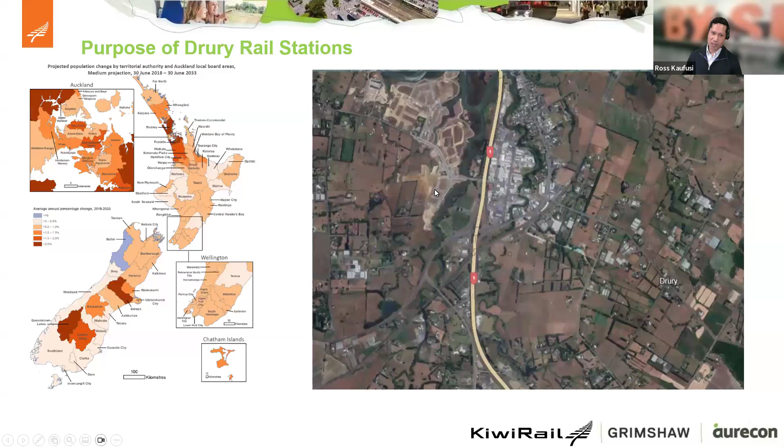Especially in the northern side and south of Karaka, you can start to see all the property boundaries being excavated, and the roads are going to be installed, and then it gets even more developed now. So this is from 2025, and this is just emphasizing the rate that South Auckland is growing. So you saw before, where they were just getting all the roads ready for the new housing, now it's housing being installed. You've got stuff down here being developed as well. Got more stuff over here, and then I believe this is our station over here.

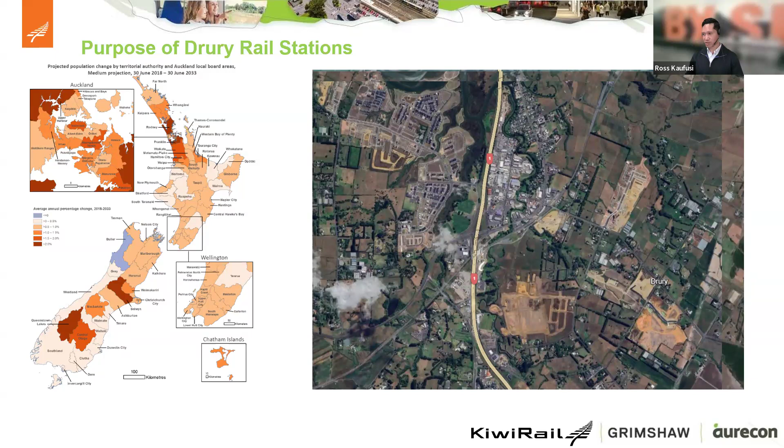So these are not small incremental developments. They're entirely new communities being built, and so with growth at this scale, it's vital to get new transport infrastructure ready from day one. Oh, yep. So with the expected growth rate, that's pretty much where Drury Stations come into play. This project is part of a 1.5 billion New Zealand government funded initiative to expand Auckland's Southern Rail Corridor. The primary purpose of the stations is to support population growth, but it also serves as a catalyst for sustainable transport.

For those living in Auckland, this should be quite a common image of today's traffic. It's not that great. It's a photo of State Highway 1 as you're heading north. To be honest, I'm not too sure what day this was taken, but I've been caught out on Saturdays driving around midday, sitting in traffic thinking, hey, wait a minute, this feels like the morning rush hour during the weekdays. So I've got a few friends that live out in Takanini, and I asked them how long it takes them to get into work. They said it's about 2 hours.

So being a good engineer, I figured I'd fact check them because 2 hours sounded ridiculous. And trusty old Google Maps was agreeing with them, so I was a bit surprised. And Takanini is further north from Drury. So you can imagine once Drury's developed, and then even further south around Paerātā, the traffic's just going to be crazy.

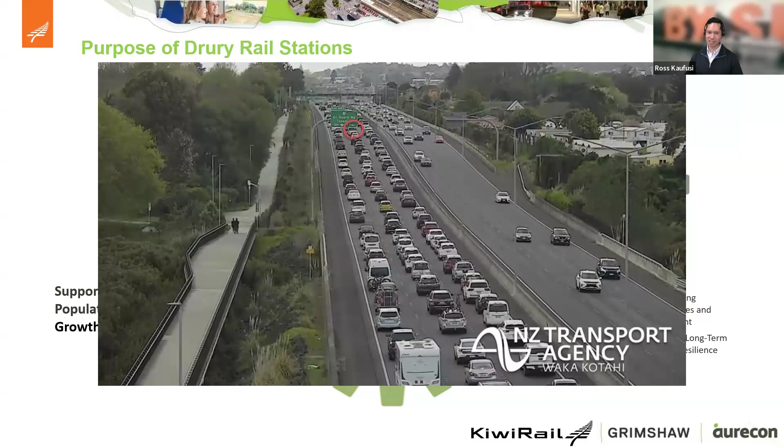So the stations are designed to reduce car dependency, and they're aimed to enable a real shift towards public transport. The idea is to help ease the congestion and lower emissions as well from a sustainable point of view. They're also designed to anchor transit-oriented communities, integrating housing, jobs, and services around public transport, which is a key focus for us here at KiwiRail.

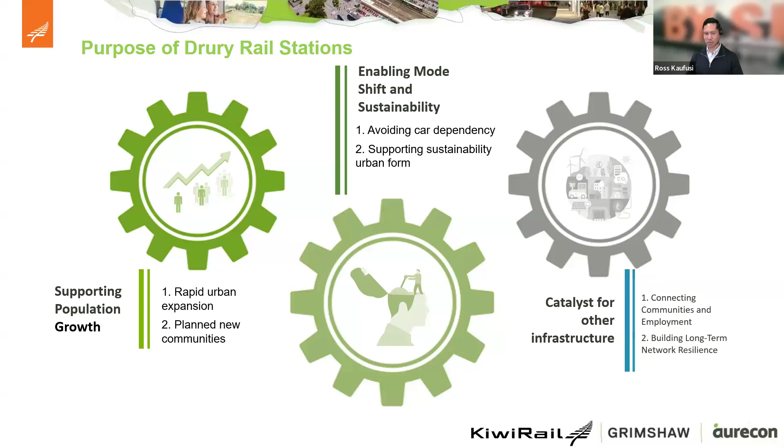Alrighty. So what now? As part of our preparation, we were trying to figure out how we're going to package this up and hand it over to someone who will take this through design and then eventually through construction. What we needed to do was to start defining our project requirements. This is not a full list of our requirements, just a few snippets I took for this call.

One of our main drivers was to adopt a no-frills modular design approach. This is something that should be pretty common across the industry now. The idea is to use common materials, common details, and common components across all three stations. Liam will cover this in more detail, but the intent of the modular design was not only to save on both design and construction, but also to provide a safer design. If you're building the same design over and over again, people become more familiar with it, and it helps with the ease of construction.

Also, with the South Auckland area set for decades of growth, we needed to consider future flexibility and look at how rail and roading networks might expand in the next 10, 20, even 30 years. So we made it one of the requirements to not preclude any future upgrades or extensions. Each design decision was made with a long-term purpose.

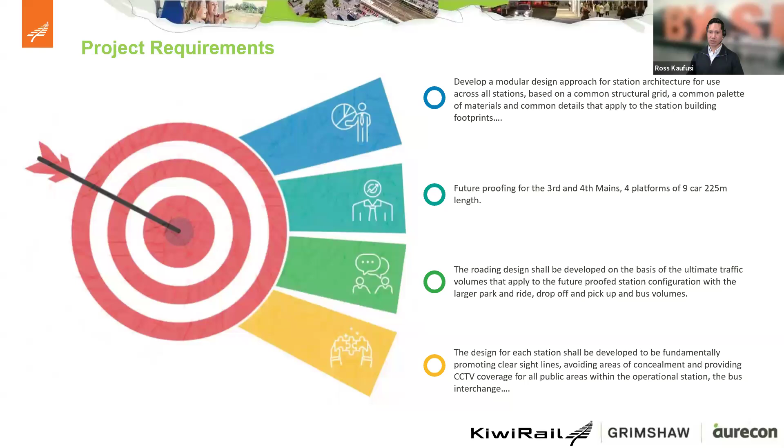All right, so location, location, location. With that all said, cool, we need some stations. Where are we going to put them? Since we're talking about South Auckland, there's only one line that gets down through South Auckland. That's the NIMT line, the North Island Main Trunk line. So the idea was, okay, we've got this line. We'll put some stations between Papakura and Pukekohe because there are no existing train stations there at the moment.

So what you see now on the left, this is an image with all the proposed projects that we had at the time when we were putting all the scoping and all the requirements together. This image is to show all the proposed projects, or current projects that are happening and future projects that will be happening. And so we were looking at this and said, okay, we've got all these projects. Where's the best place to actually integrate these stations into this project?

Hopefully you can kind of see those three arrows of Drury, Ngākōroa and Paerātā. It's a little bit faint, but hopefully you guys can see it. So those are the locations, and what you can see is how it's actually integrated. So you've got the red line. The red line shows the Papakura to Pukekohe electrification line. So that was undertaken by KiwiRail, which was completed earlier on this year.

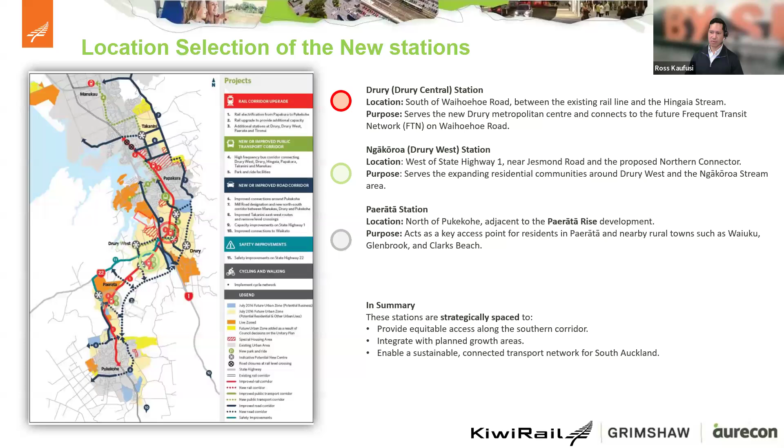All right, cool. So now that we've covered that, we know that we need some stations, we kind of know where they're going to be positioned. Now we're getting into a position where we can say, hey, we need to put together a scope that we can hand over to some designers to carry on. And so what do we want to do? We want some stations. How do we want to connect to these stations? Do we want an access road? Do you want people to walk up into it? Do we want buses to just stop right outside? How are we going to treat the water? So all of this was going through our minds as we were putting together the scope for this.

We're going to have some new platforms. How big do we want the platforms? Well, we want them to be 6-car, but we know that in the future AT want to introduce 9-car trains. So let's design for 6-car now, but future-proof for 9-car, so we don't have to do too much.

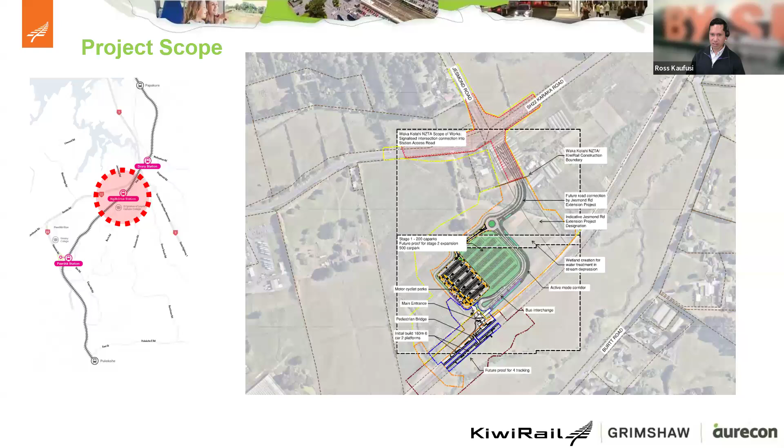Cool. And lastly, we've got Paerātā. So again, the scope is very similar to the other 2 stations. At a high level, we've got parking facilities, the same platform requirements, same treatment of runoff requirements. We've got bus interchange, and we also need an access off State Highway 22. So this is what we've done over here. But what's a little bit different is that we weren't too sure what was happening with the State Highway 22 upgrade works further down towards this side. So we've actually designed this package of work and then handed it over to Waka Kotahi NZTA to implement.

What we've also done is, if you can recall, on the other slide we had the Pukekohe Expressway over here somewhere. So there's a link that joins us up to the station. It comes in and links up to this roundabout. Once that links in, there's potential for that link to be 4 lanes. At the moment, we've only got 2 lanes over there. So as part of our scoping, they said, can you make sure this is future-proofed so that it can be expanded from 2 lanes into 4 lanes?

And while you're doing that, can we ensure that the other project, the Papakura to Pukekohe electrification project, which is running along the rail line, can space out their design so that nothing changes for them? So that was part of the project scope. Just make sure that everything is done with all those future things in mind. All right. And so that's just a quick snippet of what our baseline scope was for these stations.

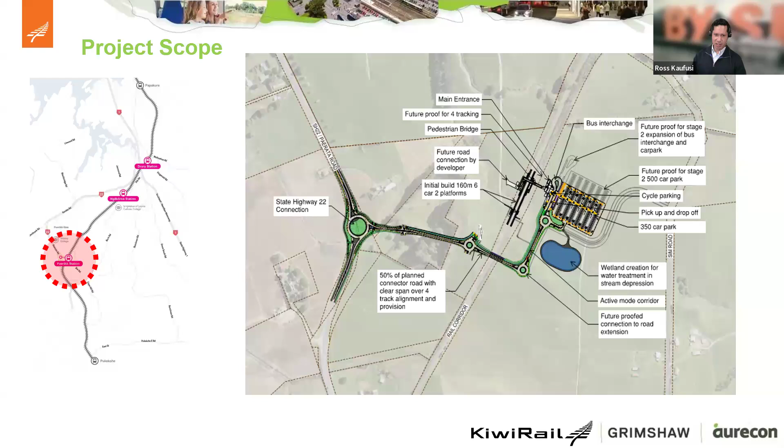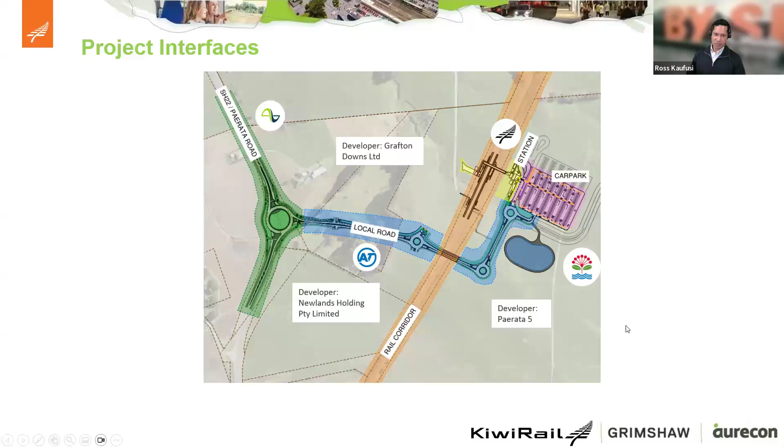So, right. From what we've seen so far, the project is much more than just building inside the rail corridor. It's about delivering integrated infrastructure that connects with multiple stakeholders. The image on screen right now shows you how many parties are involved. And remember that we are not just building KiwiRail assets, but we're building assets that would eventually be handed over to other owners. So these are just some of our key interfacing partners at the moment.

We've got Waka Kotahi NZTA, which is the green bit over here. You've got third parties in the area, so some developers: Grafton Downs, Paerātā 5, Newlands, they're all within the area, and they all have an interest. You've got Auckland Transport, who are responsible for the local roads, bus connections, active modes. You've got Auckland Council, ensuring our investment aligns with their growth plans and zoning. You've got Ministry of Transport, Supporting Growth Alliance. So that's just a short list; we've got many more interfacing partners. This is just to highlight the highly collaborative environment we've got here, and managing these interfaces has been crucial to this project.

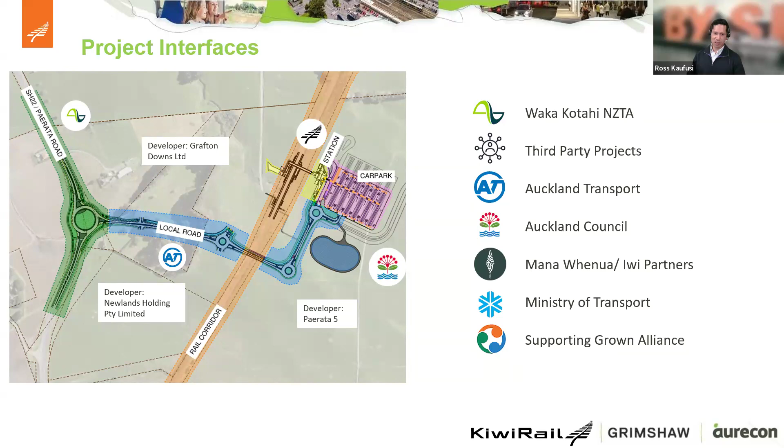All right, so just going on that kind of thought. Having an understanding of what assets we're building and who will ultimately own and operate them has helped us structure design into packages that could be delivered independently. So we've divvied up our packages into 3 key packages: the state highway package, a station package, and a civil package.

As I mentioned earlier, this has enabled us to engage Waka Kotahi NZTA's delivery team to deliver the state highway package, which is the one that we've done for Paerātā. The reason why we've done this is to ensure a smoother handover process to them, because they will become the eventual asset owner.

Going on these 2 packages, the reason behind separating the civil package from the station package was essentially driven by limited numbers of contractors with experience working in the rail corridor. So we didn't want to put that restriction on the market. There's quite a large portion of the civil package that doesn't really need to interface with the rail. Let's separate that out and open it up to a broader market.

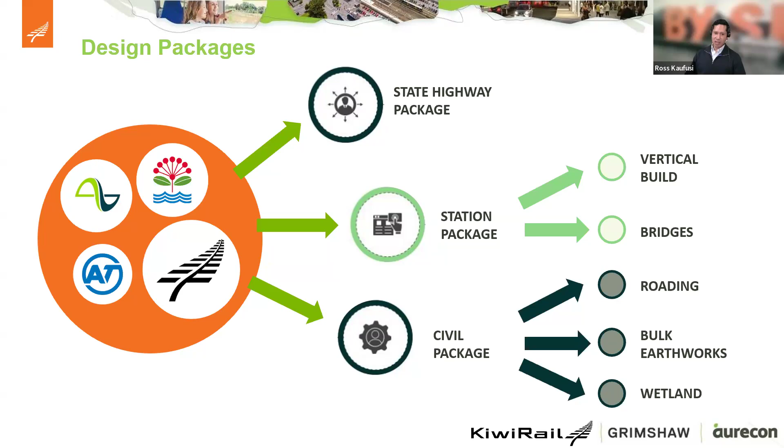And then conversely, for the station package, that's allowed more specialist structural contractors to do what they do best, and that's delivering complex station structures within a live rail environment.

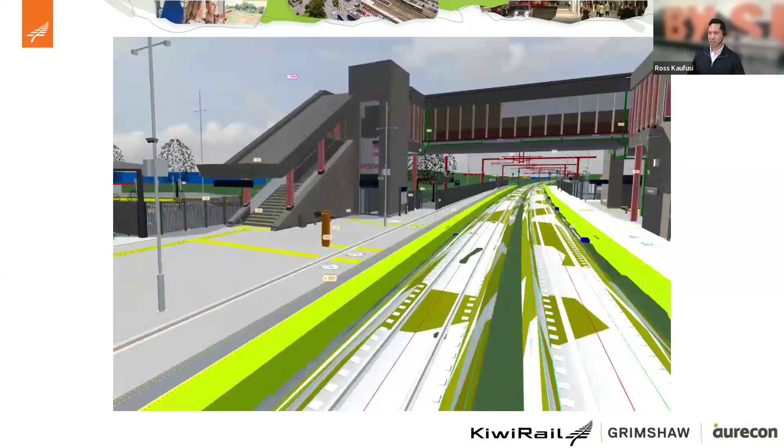All right. So that brings me to the end of my section. As I transition to design, I thought a good way of transitioning to Liam's bit was to show a very quick snippet of our federated Drury station Revit model that we designed during the design phase. It's quickly flying through the models at the moment, so apologies about that. I just didn't want to take too much of Liam's time because I know he's got a lot to talk about.

But to sum it all up, the Drury Rail Stations project is more than just building new stations. It's about planning and designing transport infrastructure that supports how Auckland will grow over the next 30 years. So I will now hand it over to Liam, who will take you through the design in more detail.

Cool, thanks, Ross. Hey everyone, my name's Liam McIntyre. I'm part of the rail design team on Drury Rail Stations from Aurecon. I thought I'd start off with some renders to show you the context around what we're building here. This is showing stage 1 for Drury Station. You can see the main station building there in the centre. I'm not sure if you can see my mouse, but in the centre there, below the Great South Road marker.

Great South Road running up the side there, which is an existing road, the main road through Drury Centre. Along the top you can see Waihoehoe Road, which is an existing road and road over rail bridge, main access for vehicles into the station. The station access road, which we're also building, will connect down to Flanagan Road at the bottom by the main roundabout by the station.

Along with that, we've got a car park with 350 parking bays, and a bus interchange with bus layover bays. On the Great South Road side, we've also got some bus stops that we're putting in there. So patrons will be able to enter the station from the entry on that side and also from the car park and main bus interchange side. We also have stormwater treatment at the bottom of the screen there. You can see the wetland in the visualization.

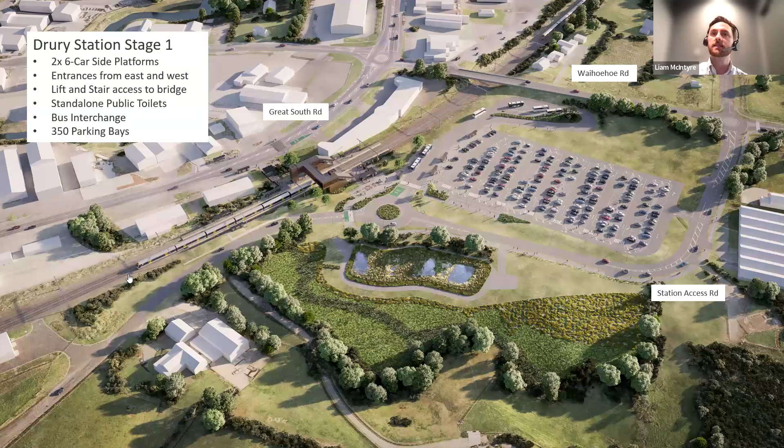And then for the station itself, we've got an entry canopy on both sides covering a gate line. We've got a public toilet by the bus interchange, and then a bridge to access between the two platforms with vertical transport, stairs, lifts, and entryways on both sides. And we've got the platforms there.

In addition, I'm also going to show you what our stage two looks like. Stage two is kind of what Ross spoke about before, a combination of what we're doing as a project in the future, but also seeing how that ties into future projects as well. If I start at the top of the screen there, we've got Waihoehoe Road, which is an upgrade widening project that Auckland Transport is undertaking in the future.

So a widened bridge there. This is an early concept of it, so it won't necessarily look like this, but it's showing how our design can tie into that. Also showing how we could have an additional roundabout in the bottom right corner there, underneath the station access road marker.

So that would be for accessing one of those developments that Ross was speaking of before. Car park increases from 350 to 500 parking bays. And then for the station itself, we're showing additional platforms to allow for the third and fourth main.

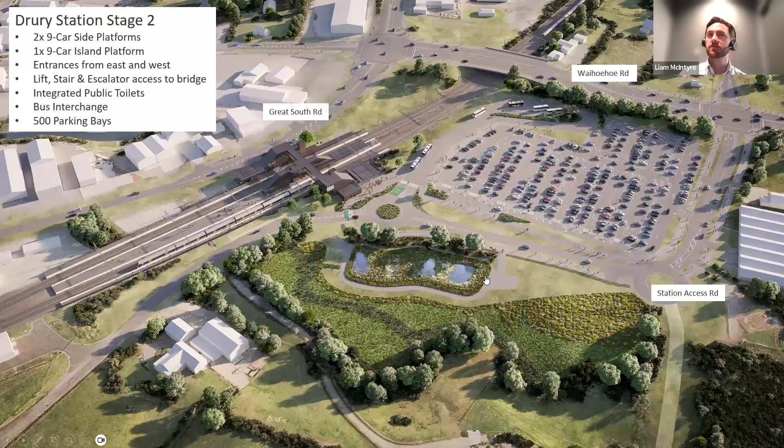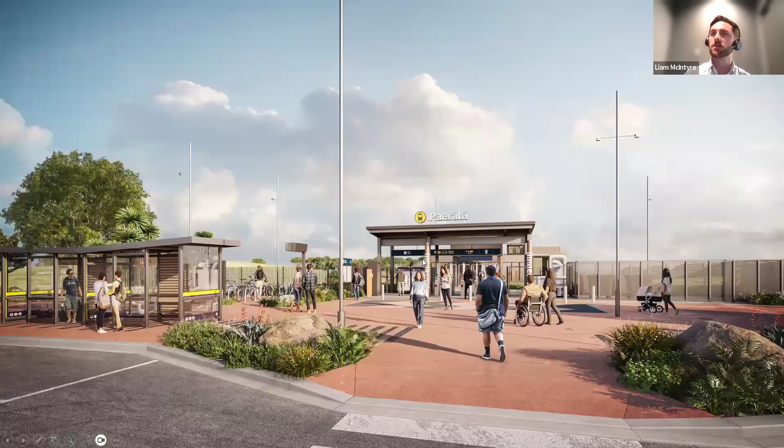And you can also see a visualization of what we're going to see for the Grafton Downs development. You can see some conceptual sort of buildings there. So trying to indicate what we're going to see when we have that development and how that's going to tie into our stations. I also wanted to show you what entries to these stations are going to look like. So this one here is the entryway to Paerātā Station. Both stations are very similar at stage one.

So you can see an entry canopy there, similar entry canopy to what we're using across the network. You will have seen some of these go in at stations like Middlemore, using a similar sort of element there. Also at Parnell, got similar ones there too. Then along with that, we have a security kiosk on the side for the gate line, ticket machines, and a bus shelter for the bus passengers. So as I say, very similar design at Drury Central.

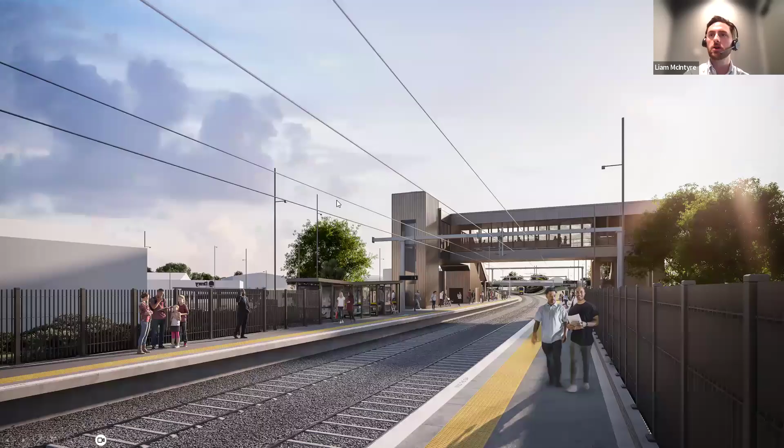And then I wanted to show you what we're going to see on the platform level. So this is back at Drury Station. This is on the car park side, so the car park is off to the right of this image. So this is what we're building now at stage 1. You can see we've got platform shelters there, which are similar to the major shelters that you see across the Auckland Transport network for buses. You can see our bridge and everything in there. And then moving forward to stage 2, looking at widening out the platforms for the increased patronage.

So you can see 1 in red is the entry canopy. So this is the stage 1 version of it. So it's a reasonably small footprint, but it serves the purpose for what we need with the demand on these stations at this stage. 2 in yellow is the staff facilities. So that is things like a bus layover for the bus drivers to rest. We've got one of those at Drury Central, given the bus timetables through there. And it also houses the security for the station.

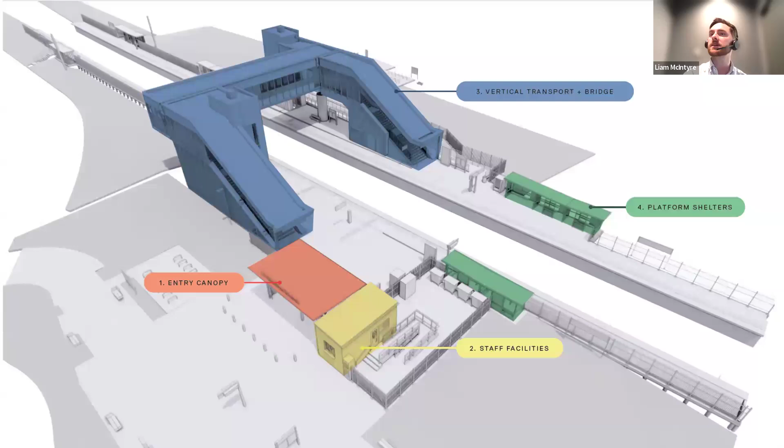We've also got our vertical transport and bridge. So that is the stairs and overbridge that I was speaking of before with lifts, and you can see the 2 lift towers. And then our platform shelters, the 2 in green, you can also see some further down the platform as well. So they are the major elements that you see across the network.

So along with the overall design, I thought I'd take you through some key design considerations and challenges we've had on the project. So the first one there is the modular design process, which Ross was speaking of before. Optimization of our concept design, how we've taken from the Supporting Growth Alliance concept design we received at the start of the project, and also a little bit on the ground improvements we had to undertake at Drury Station, given the ground conditions out there.

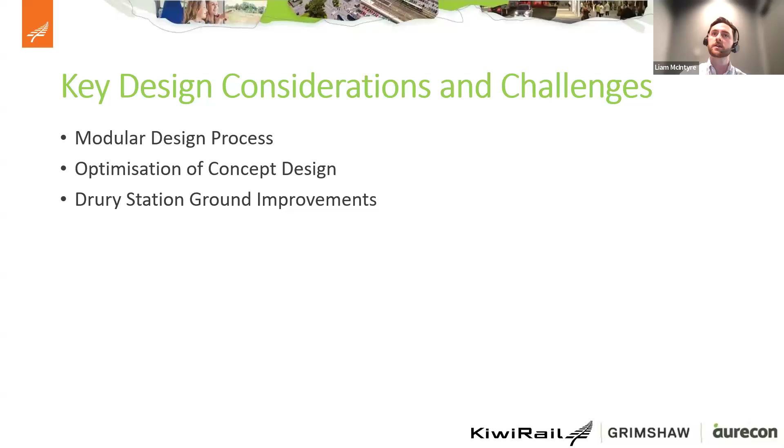So first going through the modular design, a very important aspect of how we went about these designs was making sure that everything was modular across the 3 stations. These figures are provided by Grimshaw. So what we did was we separated each element of the station out into a discrete module that we could take forward from concept right through to construction. And then this allowed us to simplify our design by having one single set of drawings for each module that could be used across each station.

So the vast majority of our drawings for disciplines like architecture, structures, bridges, most of those drawings are actually project-wide drawings. So this carries a large range of benefits and simplifies our design process. We only have to do these things once with very few tie-in drawings to make them applicable to each site. It optimizes it through the construction phase as well. If there are learnings from one station, they can be used on the other stations because the designs are exactly the same. It also allows for plug and play future expansion.

Since we've already designed module 3, as an example, the side stairs, we can pull that across once we come to having the 3rd and 4th main coming in. And also it allows us to pull these modules across into future stations on the network. So if electrification was to go further south past Pukekohe, then we could do very similar things. The design's already sitting there. We just need very few design drawings to tie everything in. And it also allows for optimization of the procurement, makes it easier for KiwiRail to procure across all 3 stations in different methods, depending on how they want to do that, if all the designs are the same.

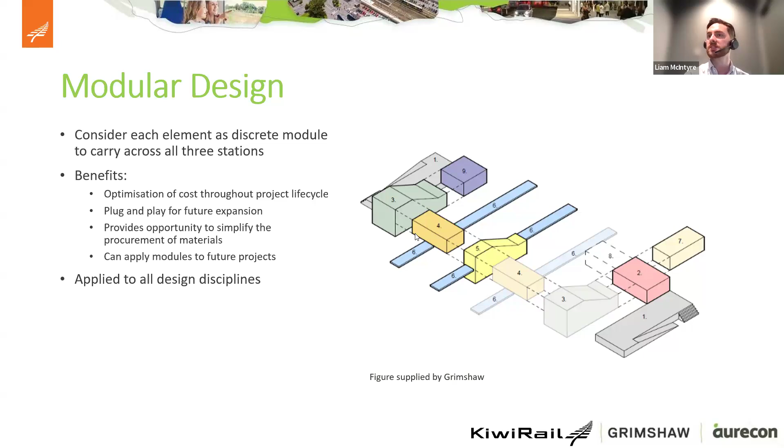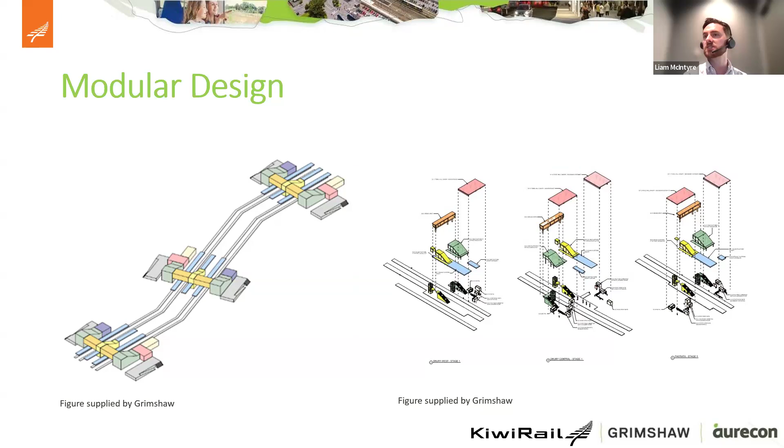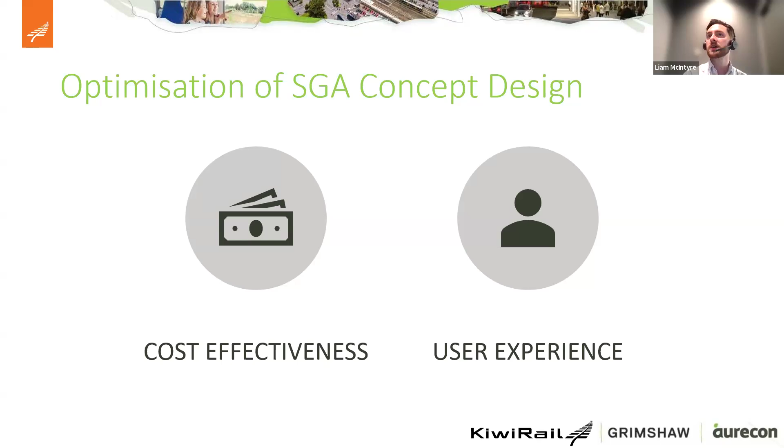So the next thing I want to talk a little bit about was optimization of the Supporting Growth Alliance concept design. So we took the concept design and looked at it for 2 main things, cost effectiveness and user experience, as the 2 main things that we wanted to optimize from the concept design to make sure it was all fit for purpose.

The main one I want to talk to you about is the optimization of the Paerātā pedestrian bridge. So the render in the background there is showing what stage 1 is, the render I showed you previously. You can see it's different with Drury Station, where passengers from the car park and the bus interchange are accessing it from the bridge level rather than from the ground level like Drury Station. And this is to do with the existing site. It's a much higher level on that side than the rail level, so it makes more sense to have people enter from that side.

Now, the initial SGA concept design didn't have passengers walking across the bridge. They had them going down, as you can see, my blue path with the white arrows in it. So the initial design had vertical transport in the form of stairs or lifts or ramps going down and then going across at platform level down to the platform. And then if someone wanted to access the other platform, they would have to walk back up the stairs and then come back down the stairs on the other side.

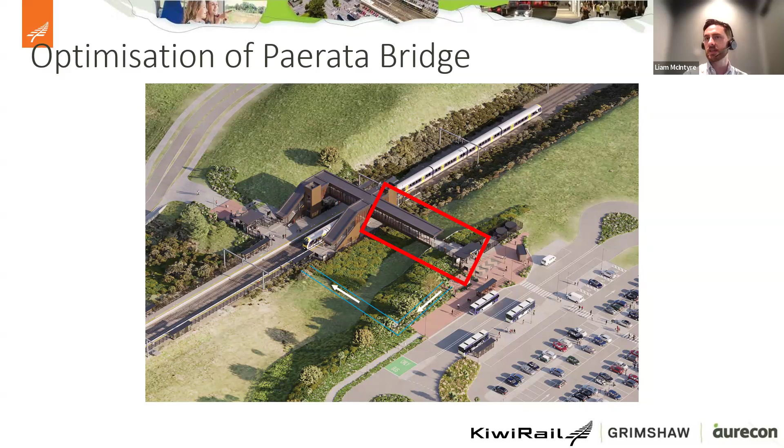So from a user experience perspective, this is not a very good outcome. And this situation would be present, at least in the initial concepts, throughout the stages. So even when the 3rd and 4th main came in, passengers would still have to walk down and then walk back up a set of stairs to access the other platforms. So we looked at some concepts about how we could fix this, and we found that there was a reasonably cost-effective way to do this.

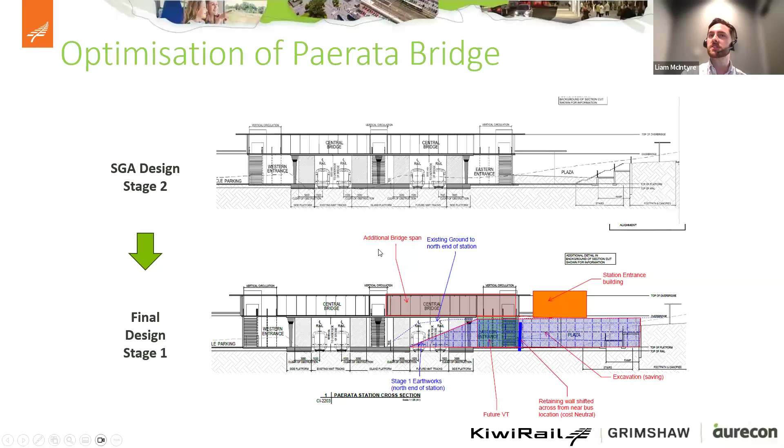So as I said before, enhanced customer experience at both stages. Similar overall cost when you take into account the construction of these additional stairs. Building the additional span of the bridge now was an additional cost, but not that significant at stage 1. And obviously, it optimizes the overall cost for stage 2 as well. We no longer have to come in and build an additional span when we put in the 3rd and 4th main. And this comes with a reduced overall footprint and a lower carbon footprint, less materials we need to use. We don't need to build these additional stairs for the project lifecycle, and just fewer elements to construct at stage 2.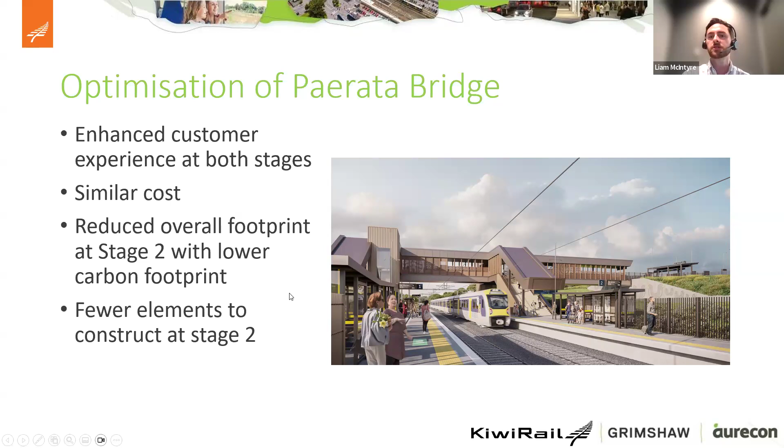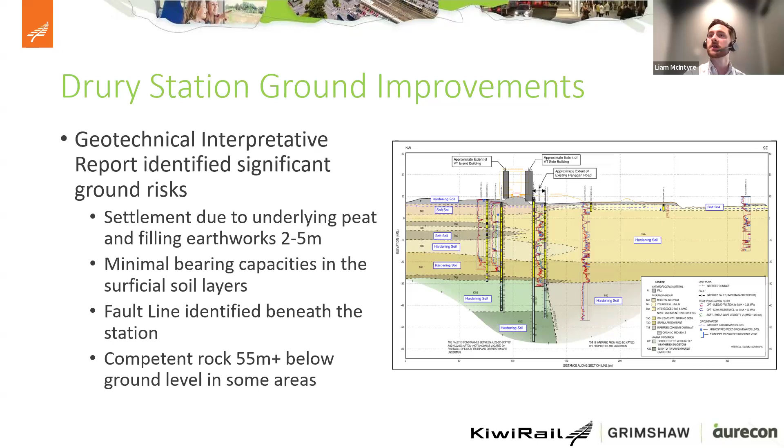And we also had underlying peat layers running all through this area. So there was a significant settlement risk in this area, and a traditional pile design was not going to work well. I was going to have settlement issues outside of our allowable bounds. And along with this, we also had minimal bearing capacities in the surficial soil layers, and competent rock was more than 55 meters below the ground level in some areas. So because of this, we decided we would need ground improvements in this area.

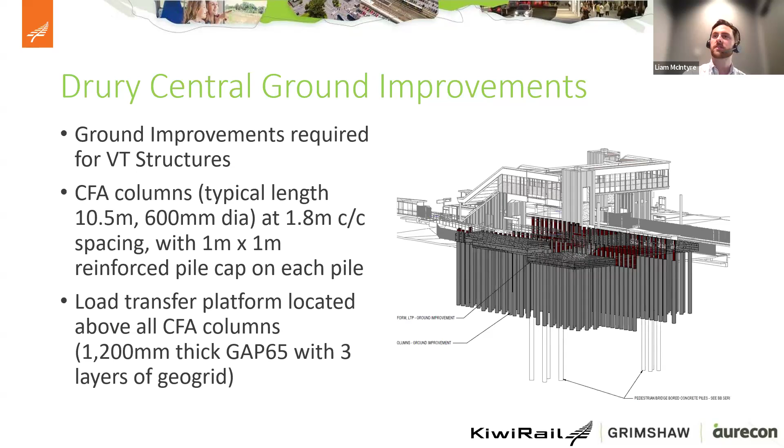And it also allowed us to actually design a module for ground improvements. So now when we do future stations, we already have a ground improvement module that we could use tied into the stations. And this is going to optimize the cost life cycle for all future stations across the network now that we've got this additional module as well. So that's me going over the design. I'll hand over to Alpesh now, who will take us through a little bit of the construction phase.

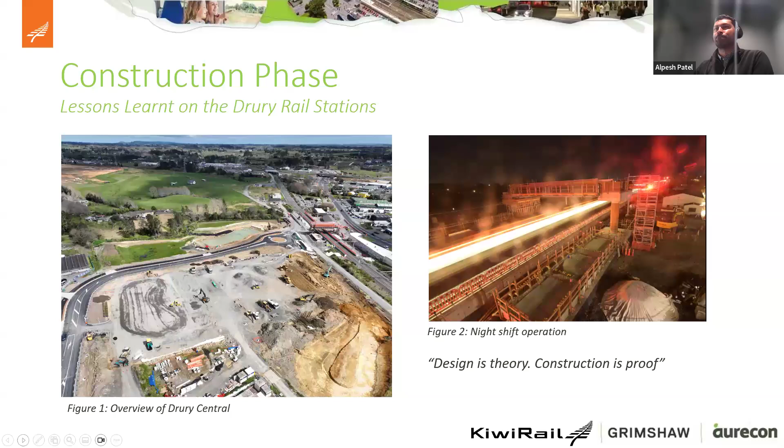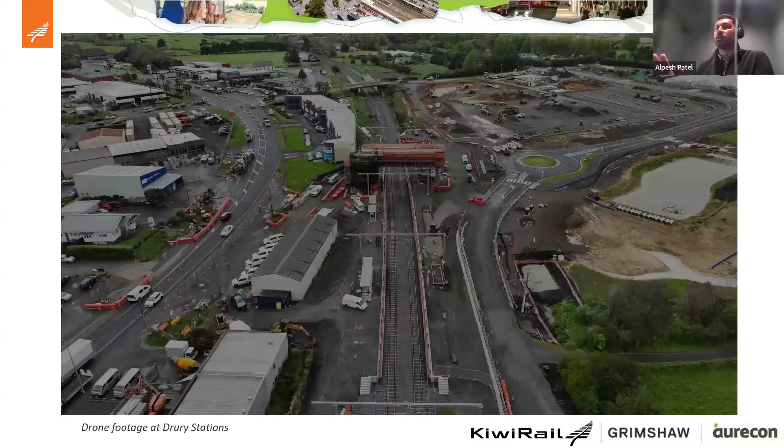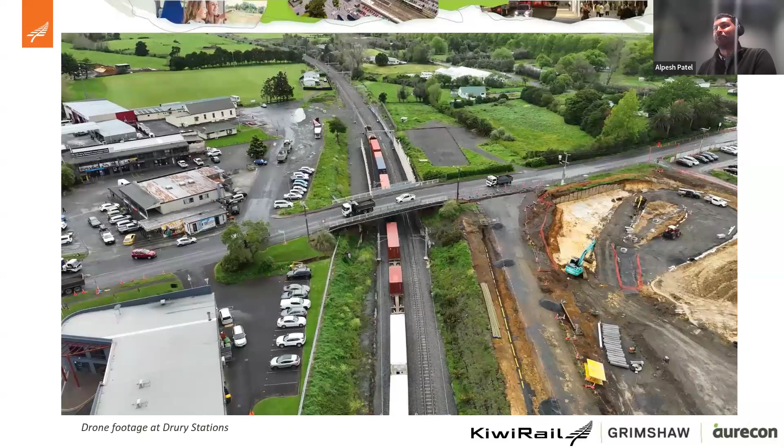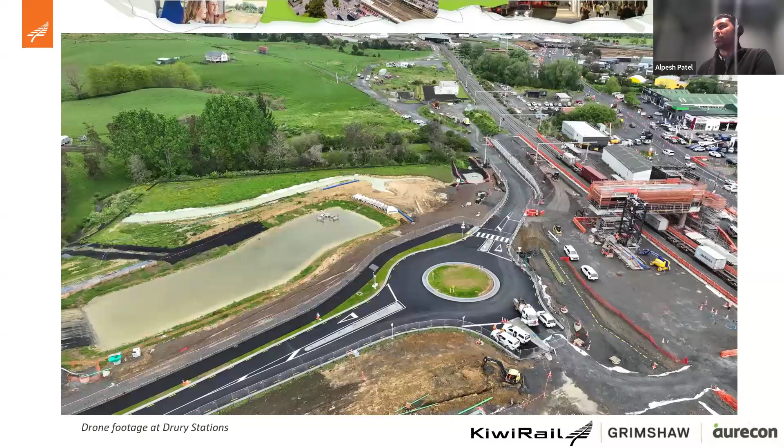But first, I'd like to just understand the current state of play. Here is drone footage of Drury Central, courtesy of Jason from KiwiRail Technology Lead. Here you can see the pedestrian bridge at Drury Central, and on the right-hand side, you can see the car park and the bus turnaround area just in front of Waihoehoe Road Bridge. And just turning around, you can see the wetland, which is the current retention pond, the station access road roundabout, and on the right-hand side, you can see the pedestrian bridge that crosses over to Great South Road.

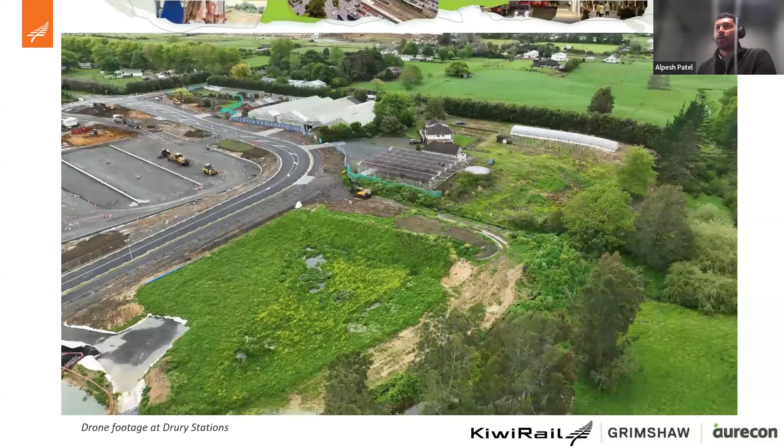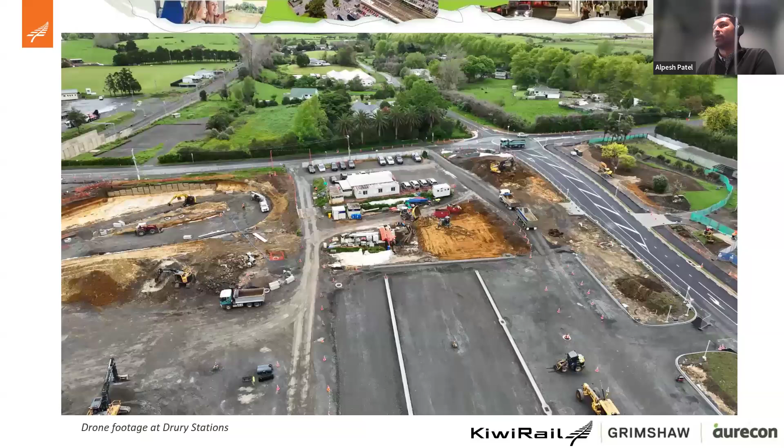And here is a final shot of the car park area, which is in build. On the left, you can see the bus turnaround area, which you can see the exposed clay at the moment, which we're currently constructing. Perfect. And the next one is the Paerātā site, which I'll quickly talk through as well.

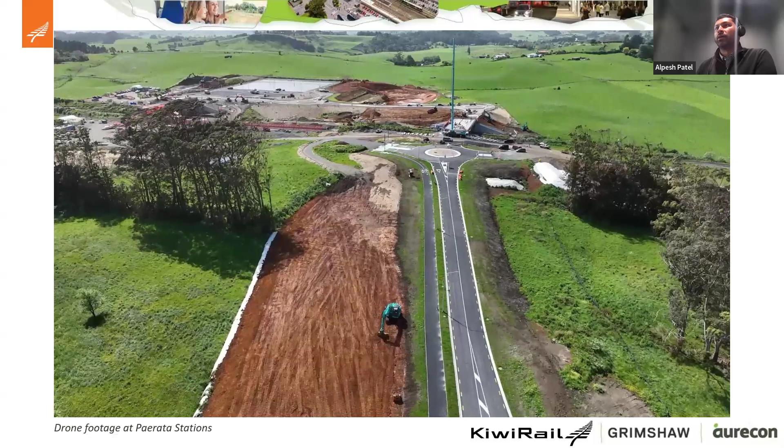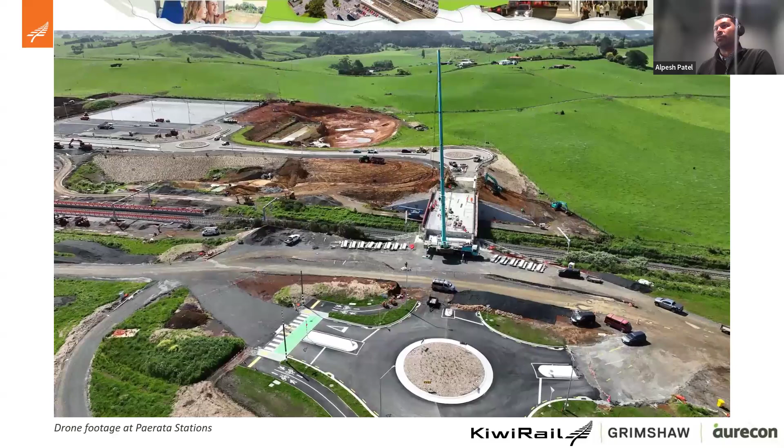Here is State Highway 22 roundabout, and then that connects into the local access road. And there you can see where the roundabout on either side has been future-proofed for the future development works. And as we cross over, we're at the road over rail bridge that we're currently building. And then on the left-hand side, you can see the wetland for the Paerātā site as well.

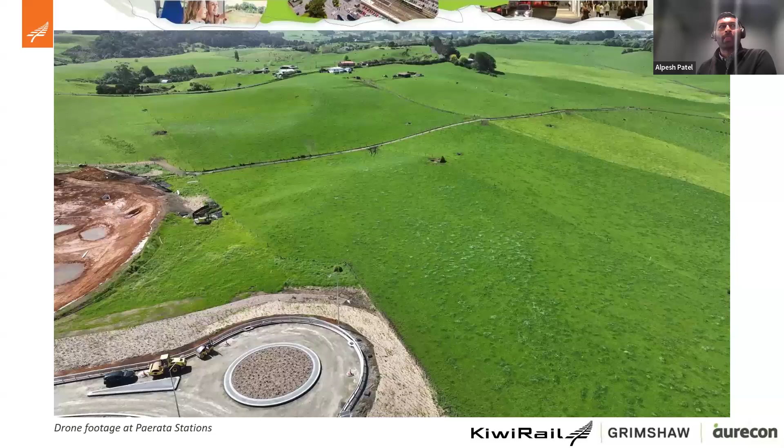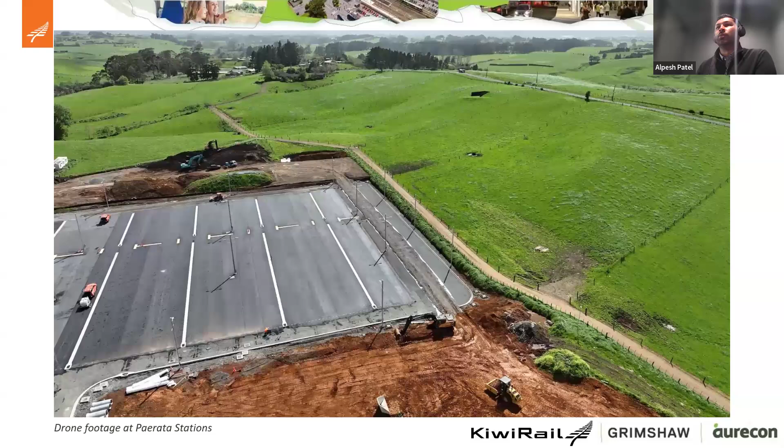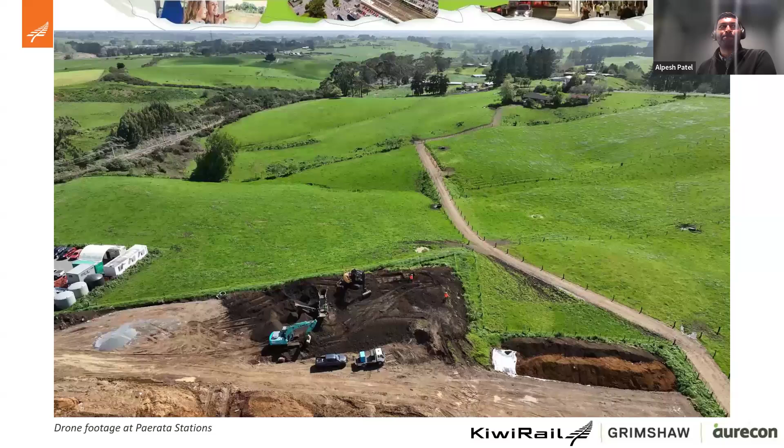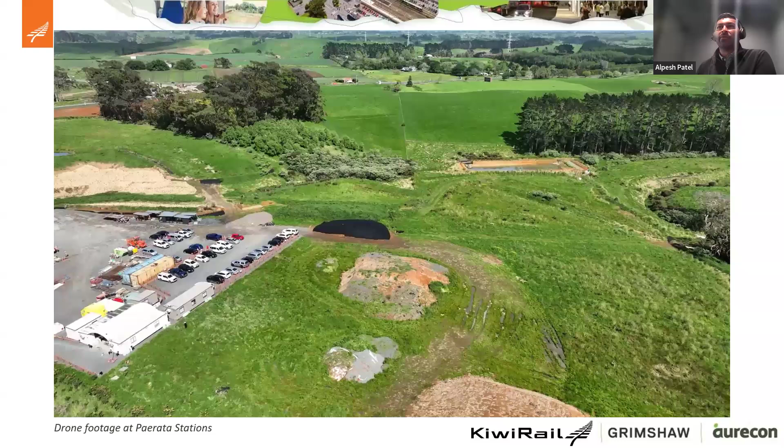And the wetland part of it moves on to the car park. As you can see at the Paerātā site, the car park's a lot more developed, where the asphalt is almost complete. As you can see, the Paerātā site is a greenfield site, so lots of farmland with a stunning backdrop to work at. And finally, here is a shot around of the surrounding area and then to the pedestrian bridge. Just at the bottom there, and at the far end, you can see the road over rail bridge as well, that connects the two access roads.

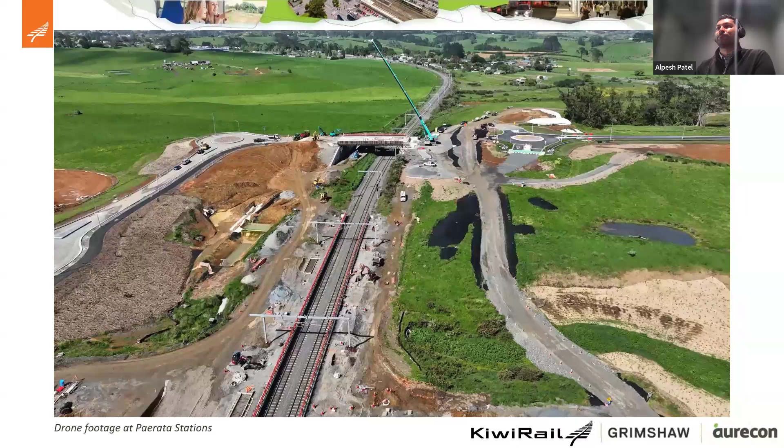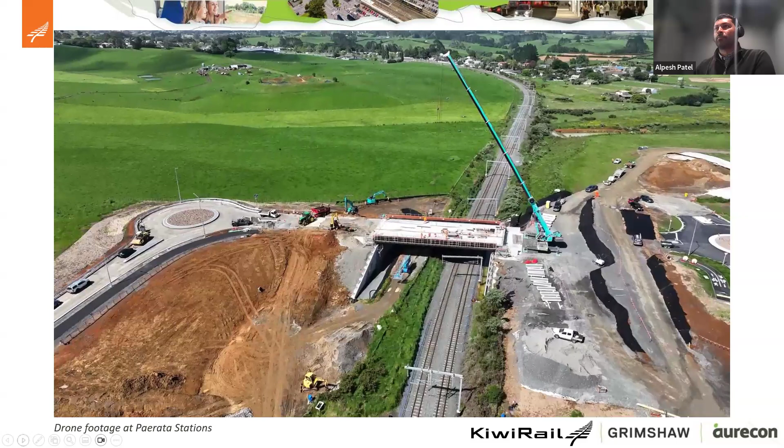All right, so as you can see, we are well into the construction phase for both Drury and Paerātā sites. We are about 70% complete and tracking for practical completion in early 2026. As Ross mentioned earlier, there is a third station that is about to start construction shortly, with an expected final completion of all 3 stations in late 2026.

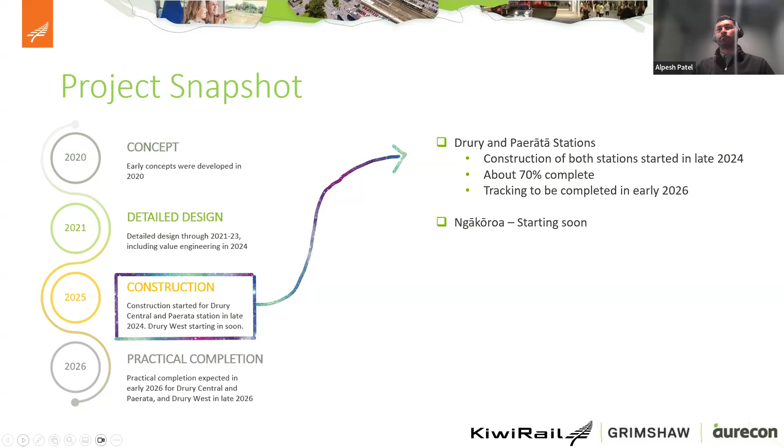The delivery approach for the project uses the traditional 3910 contract. The project team on site is made up of Aurecon and Grimshaw as a core design team, KiwiRail as our client, Stellar Projects as the engineer's representative, John Holland as the station architects, station contractors, HEB and JFC as the civil contractors, and the key stakeholders are NZTA, Auckland Transport, and Auckland Council.

Before I move on to the key challenges and lessons learned on the project, I just want to touch on some of the delivery successes. One of them being the weekly coordination meetings and design workshops with the contractors, where we discuss RFIs and the construction challenges. These platforms also provide an opportunity to share knowledge across the stations, as they are built at the same time.

As mentioned by Liam earlier, the modular design approach has benefited the construction staging, where issues picked up at one station can therefore apply to the next, and vice versa. This helps to streamline the construction process. So we're truly seeing those benefits of a modular approach in the construction phase. Some planning tools that we're using are InEight and Tucana as our design sharing platform. Some digital tools we are using on the project to help construction are Revizto, the Timescape, and reality capture models as well.

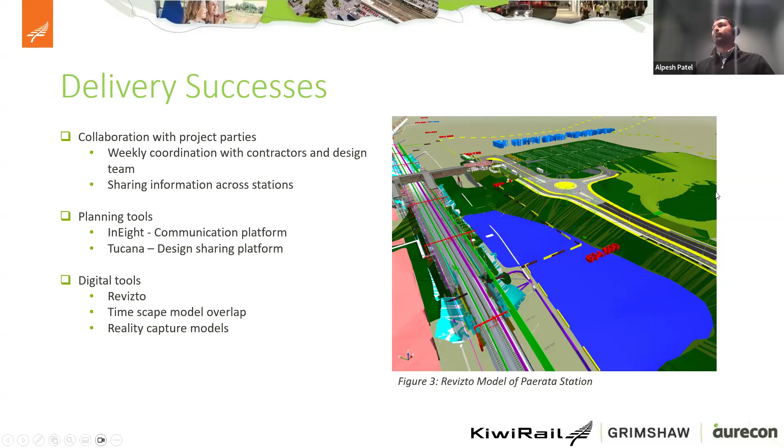Okay, so as with all complex projects, there are a magnitude of delivery challenges. The key ones on this project include working adjacent an operational rail network, inaccurate positions of underground utilities, variable ground conditions such as soft soils, organics, and a high water table, discrepancy between some of the design outputs, program constraints with staging activities during the block of line, and time pressure due to link with City Rail Link.

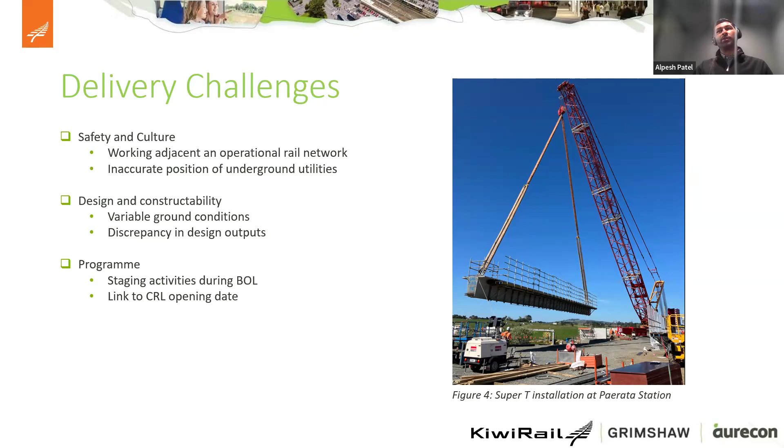For my next few slides, I'm going to dive into some of the key challenges we've had so far, their resulting impact, and also reflect on lessons learned so far on the project. The intention is not to highlight flaws within the design or construction phase, but to help share key lessons that in hindsight would have helped the site team.

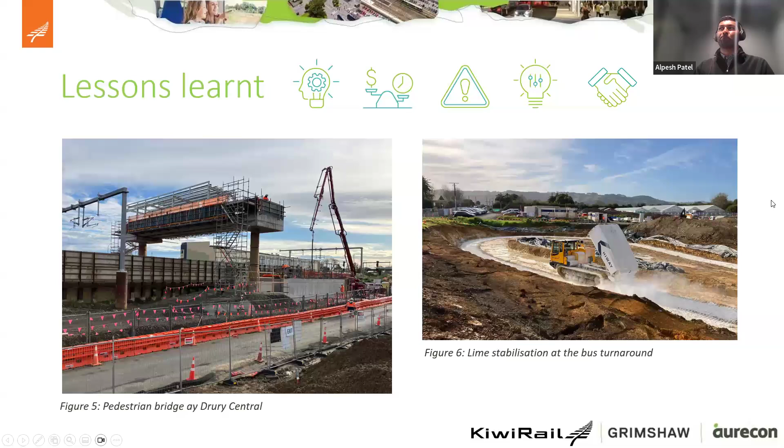Okay, so lesson one. One of the major issues we had in the project were unforeseen ground conditions. An example of this is during the earthworks phase for the car park area. We found groundwater and organic material over a large area of the site. To deal with this, the design support team had to quickly mobilize and develop a solution. With collaboration with the contractor, we settled on a drainage blanket solution made up of drainage aggregate at the base, capped with engineered fill, and overlapped with a geogrid raft. The impact of this issue, though, resulted in lost time for the contractor with an already tight earthwork season.

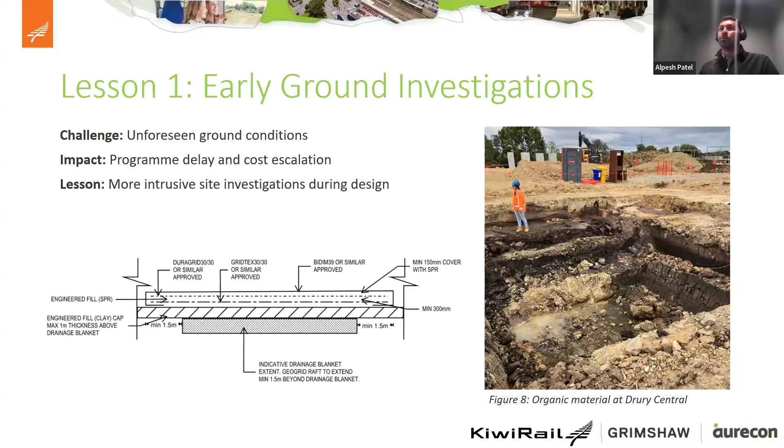The lesson here is to invest in early ground investigations during the design to minimize the risk of unknowns during the construction phase. Though it can be acknowledged that geotechnical testing was carried out during the design phase, due to access issues, it wasn't quite as intrusive as we would have liked, and therefore some of the unknowns were brought into construction.

Lesson 2, construction staging at design. The original design intent for the precast stairs installation was to partly install the structural steel, followed by the first flight of stairs, and then rotate and swing the remaining 2 stairs into place. However, due to site and boundary constraints at Drury Central, there were limited options for placing a crane and an elevated work platform in a safe location.

Unable to build as per the design intent, the contractors proposed changing 3 beams to a site weld, to eliminate the need to tilt in the remaining precast stairs, and reduce the overall air time required for installation. The impact of this change, though, required a series of design workshops and approval to proceed. The lesson here is to consider site constraints at design stage and sequencing of construction to suit your environment.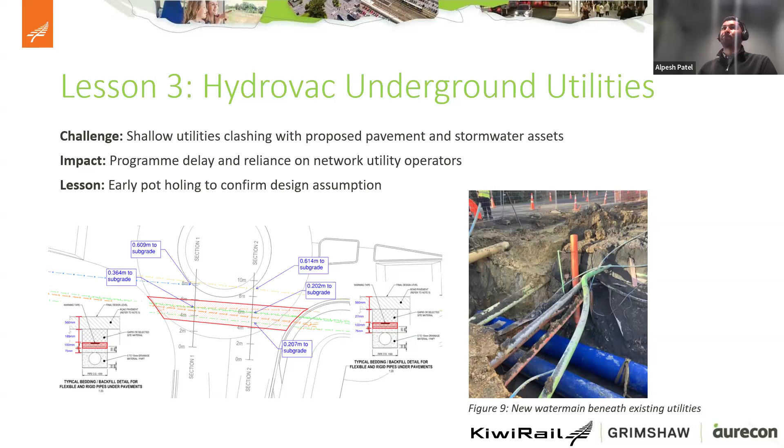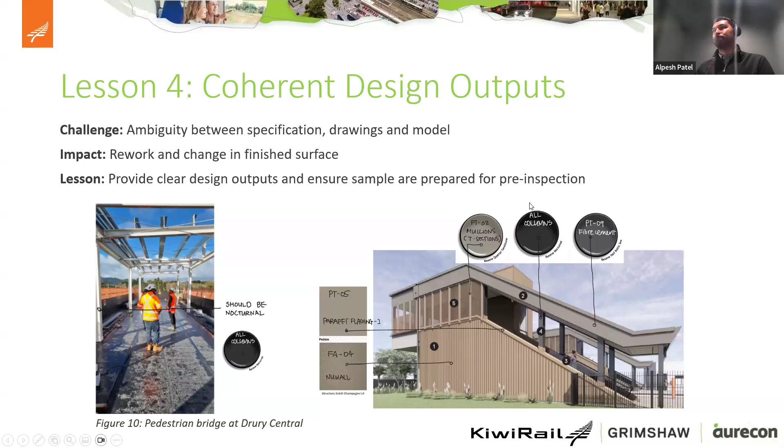To summarize these lessons, to minimize unforeseen ground conditions, conduct more intrusive site investigations at design stage. For complex infrastructure, more thought is required at design stage. For construction sequencing to suit the environment, carry out potholing early to confirm design assumptions. Ensure all design outputs are consistent to eliminate confusion on site, and ensure samples are produced for inspection to capture any errors early.

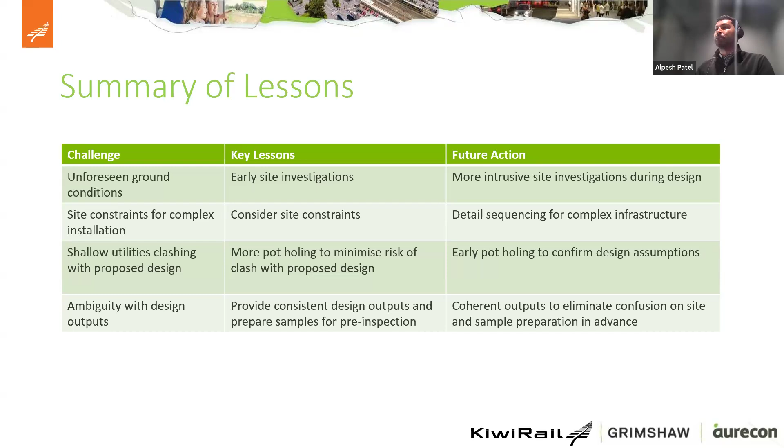Okay, so to wrap up, my key takeaways on the Drury Rail Station project come down to 5 themes. 1, know your ground conditions and investigate early. 2, treat staging of works at design for efficient construction sequencing. 3, verify what's underground to minimize the risk of clashing with new infrastructure. 4, provide coherent design outputs to eliminate confusion and ambiguity in construction. 5, prepare samples prior to any full-scale operation.

If there's one thing to take away from this presentation, it is that the design, engineering, and construction world is complex, and you will come across challenges across the project lifecycle. You can't have a perfect design or a perfect construction phase, but what you can do is learn, adapt, and hopefully carry these lessons into the next project.